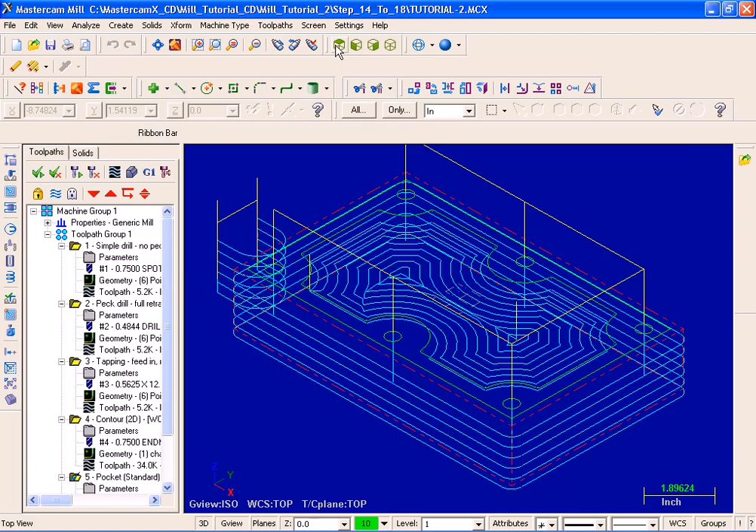Let's get working on step 14, modifying existing geometry. I'm going to add chamfers on the four corners of the outside profile. To start, I'm going to move up and pick the icon for top view. Next, I'll move over to the left, select Create, Chamfer, and then Chamfer Chains. When prompted, select Chain 1.

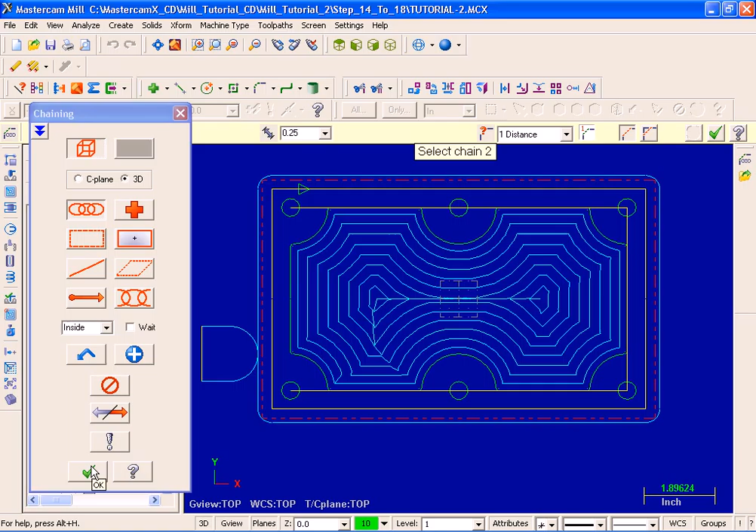I'm going to select this top horizontal line, and as you can see, it's successfully captured the contour. Moving over to the left, I'm going to hit OK. The chamfer distance is set to 0.25, so that's great. We've got it set up at one distance, and also the trim is turned on. Everything looks fine. I'm going to hit OK.

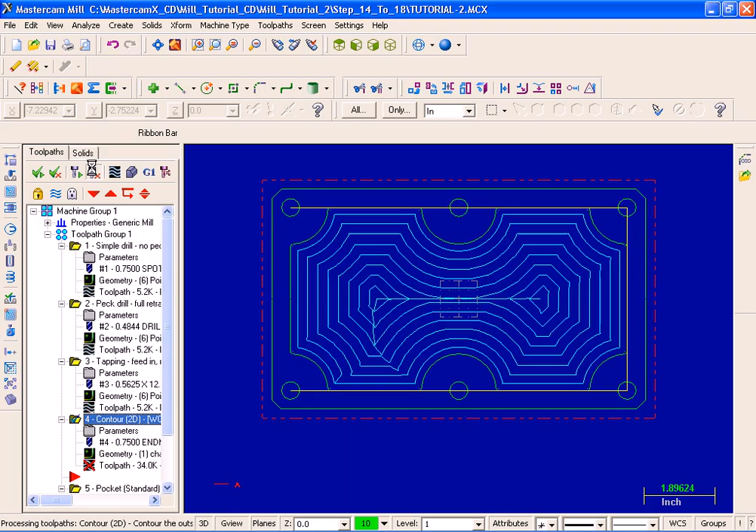If you look down in the bottom left corner, you can see an X against the toolpath for contour. What we need to do is regenerate all dirty operations. So I'm going to move on up and select the icon to regenerate all dirty operations, and that's got rid of that X.

Initially we machined out this pocket with a 3/8 flat end mill. Unfortunately, that end mill couldn't clean up the corners. The fillet radius is 0.0625 in the corner. So to improve the toolpath efficiency, we're going to use a 1-inch flat end mill to rough out the pocket. Next, we'll use a 1/8 flat end mill and the remachining pocket type to remove the material in the areas where the 1-inch tool could not fit.

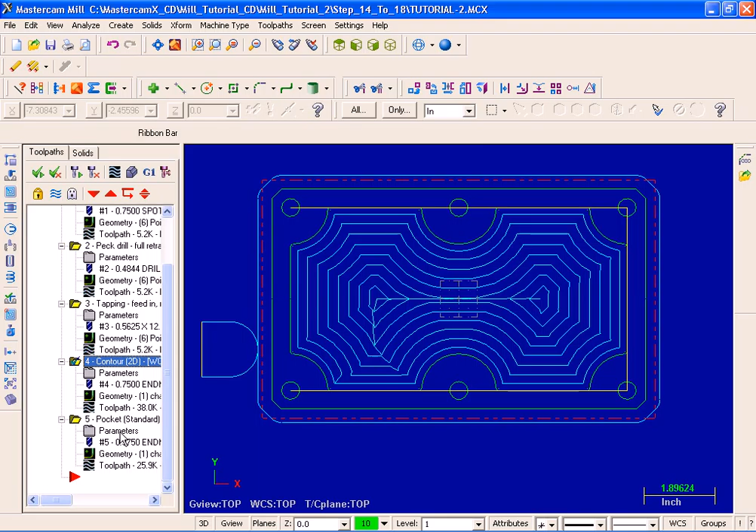What I'm going to do next is select Parameters in this pocket operation. In the Toolpath Parameters page, you can see I have a 3/8 end mill highlighted. I'm going to delete that tool by selecting the Delete key on my keyboard. When prompted, are you sure? I'm going to select Yes.

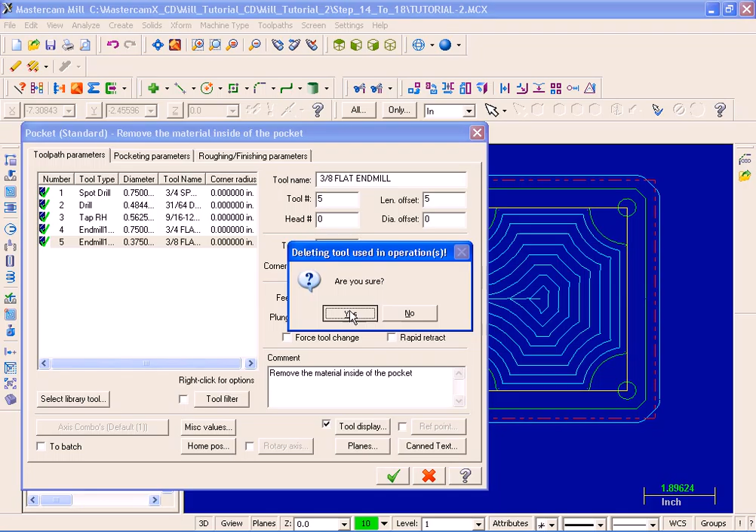What we need to do now is pick up a 1-inch flat end mill. I'm going to select Library Tool, move over, select Filter. In the Tool Types area, first of all I'm going to pick None, and then move up to the left and select this icon for flat end mills. Over in the Tool Diameter section, I'm going to leave Equal as is, but for the diameter I'm going to input 1.0.

Now I'm going to hit OK, and as you can see, it's filtered out a 1-inch diameter end mill. I've selected it. Now I'm going to pick OK. This is tool number 5. Length offset, I'll change that to 5. My comment is going to stay as is.

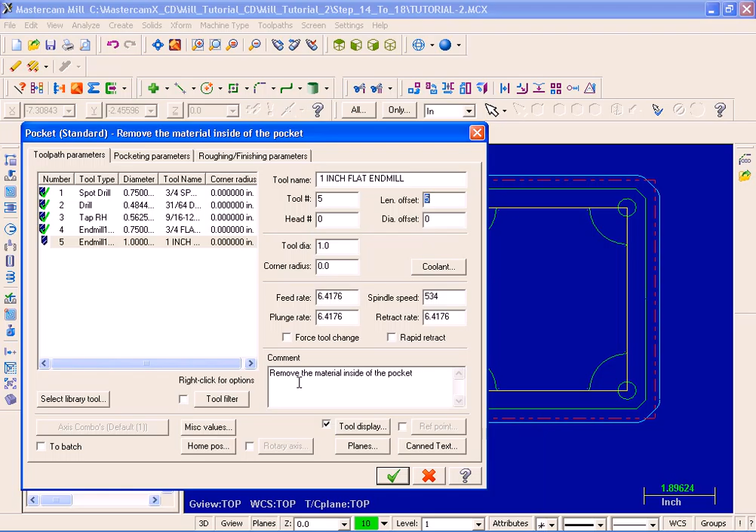Let's move over to pocketing parameters. My clearance, retract, feed, top of stock and depth are all fine, so they're going to stay as is. XY stock to leave, I'm going to change that to 0.03. What we're going to do is leave 30 thou on the walls of the pocket, and we'll finish the pocket off later. Everything looks great here. I'm going to pick OK. As you can see, we have a red X for the pocket. Let's move on up and regenerate all the dirty operations.

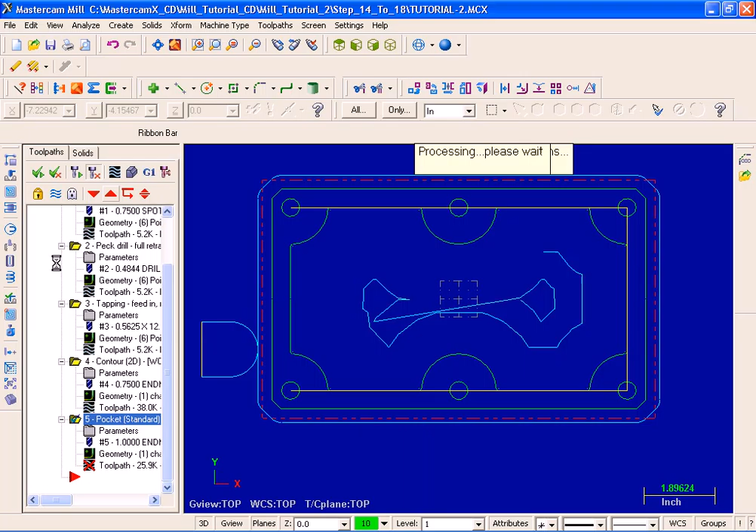Next, we're going to remachine the pocket corners with a 1/8 diameter end mill. At present, I have my pocket operation highlighted, got a check mark against it. I'm going to right mouse click, drag down and let go. From this menu, I'm going to select Copy After. Moving up, I'm going to select the icon to move the insert arrow down one item. This includes the second pocket operation. What we need to do now is move into parameters.

Let's go back to the toolpath parameters page, and the first thing we're going to do is select a 1/8 diameter end mill. So I'm going to pick Select Library Tool, then I'll hit Filter. Moving over to tool types, I'm going to pick None, and then again I'm going to pick this icon for end mill flat. Equal is going to stay as is, but for our diameter we'll input 0.125.

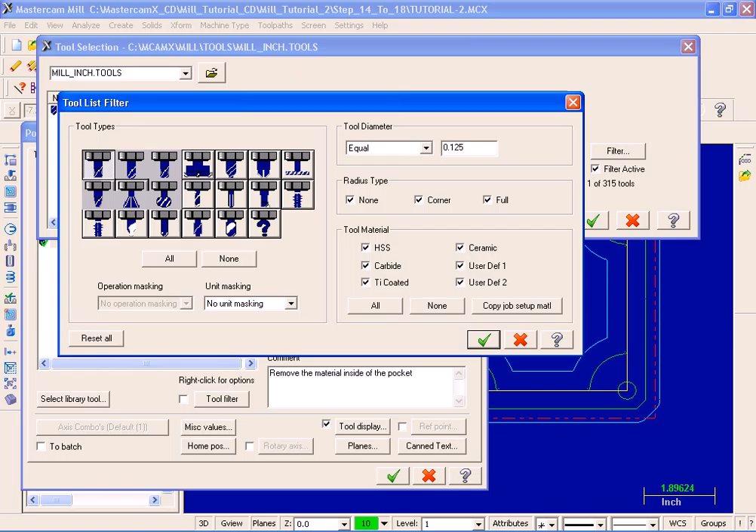Now I'm going to pick OK. It's filtered out the appropriate end mill, 1/8 diameter. I'm going to pick OK. This is tool number 6. Let's change the offset to 6 as well. I'm going to update my comment.

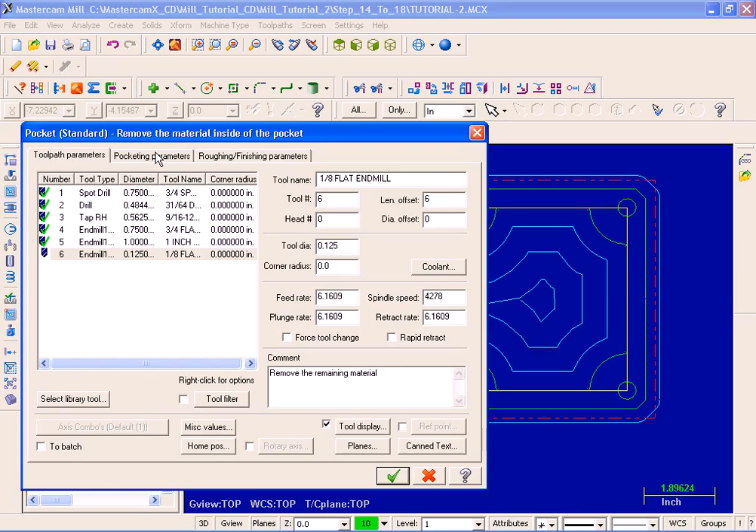And change it to remove the remaining material. Everything looks fine here. Let's move over to pocketing parameters. What we need to do here is XY stock to leave. Let's change that to 0. This is our finishing operation. Clearance, retract, feed, top of stock, depth, they're all fine.

Let's move over now to pocket type. I'm going to set it to remachining, and next I'm going to click on the remachining button. In the area compute remaining stock from, you can see we've got it set to the previous operation. That's the operation where we use the 1-inch diameter end mill.

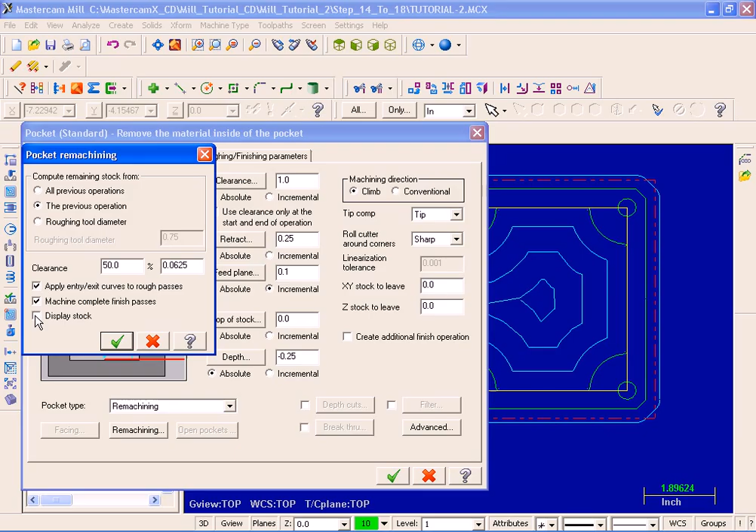Moving on down, we've enabled apply entry exit curves to rough passes, and I'm also going to put a check mark against machine complete finish passes and disable display stock. Everything looks fine here. Let's pick OK.

Next I'm going to enable depth of cuts, move into depth of cuts, and for the rough step I'll change that to 0.05, 50 thou. Finish cuts I'll leave at 0, and the finish step I'll change that to 0. Everything looks fine, so I'm going to hit OK.

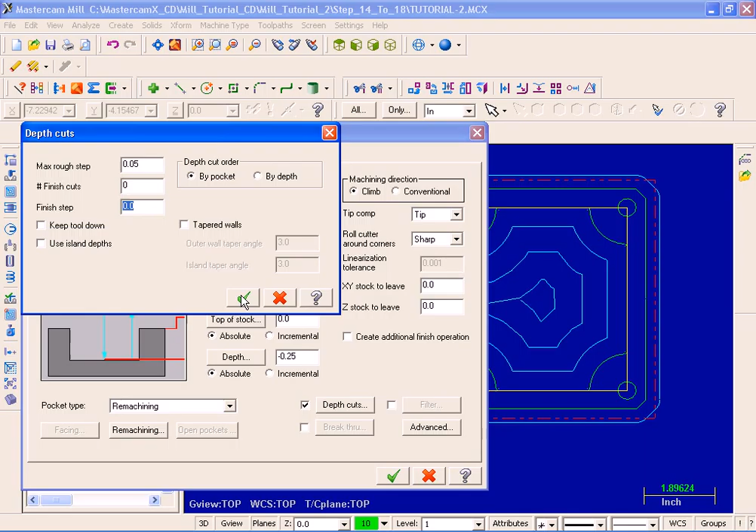Let's move on now to roughing finishing parameters page. The cutting method is set at parallel spiral, so that's great. Let's move on down and enable finish. I'm also going to turn on lead in, lead out, and move into the lead in, out.

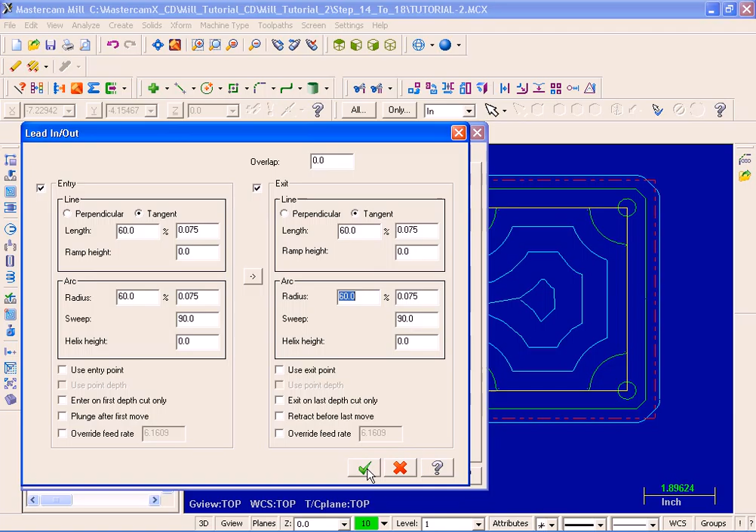Entries on, exit on. The length for my entry, I'm going to change that to 60%. The arc, I'll do the same, 60%. For the exit, I'm going to change the length to 60, and the arc likewise 60. Everything looks fine. Hit OK, and now I'm going to hit OK to exit pocket parameters.

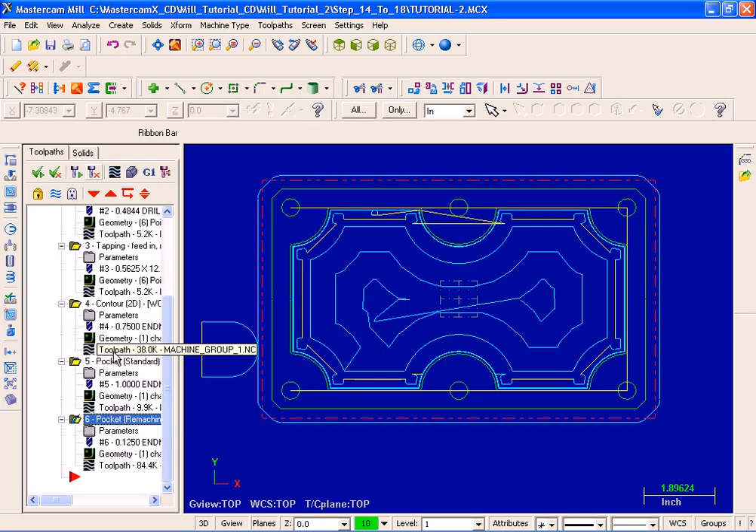We need to get rid of the X, move on up, regen all dirty operations, and the X disappears. Let's move on to step 15. Let's verify the part. I'm going to move up and select all operations. Next, I'm going to pick verify. I'm going to move the dialog box up and get an isometric view.

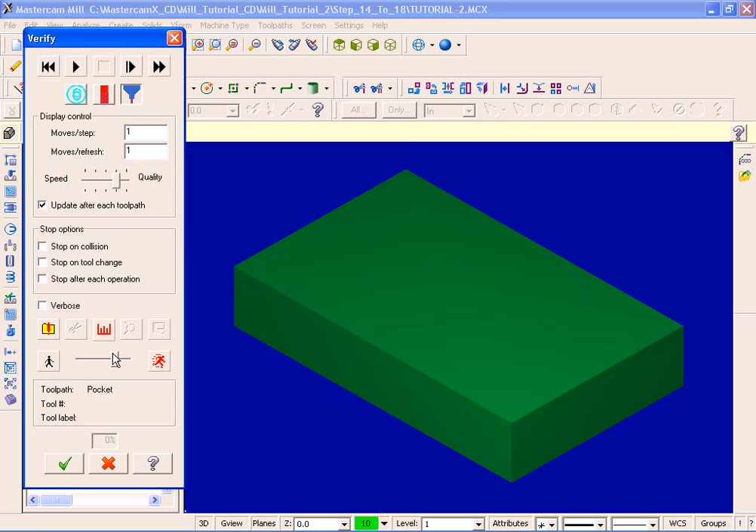This time I'm going to hit the button to simulate tool and holder. Let's increase the quality. Moving on down, let's slow the speed down. Everything looks great. I'm going to hit the machine button. First up is the spot drill. Next, peck drilling the holes, third operation, tapping.

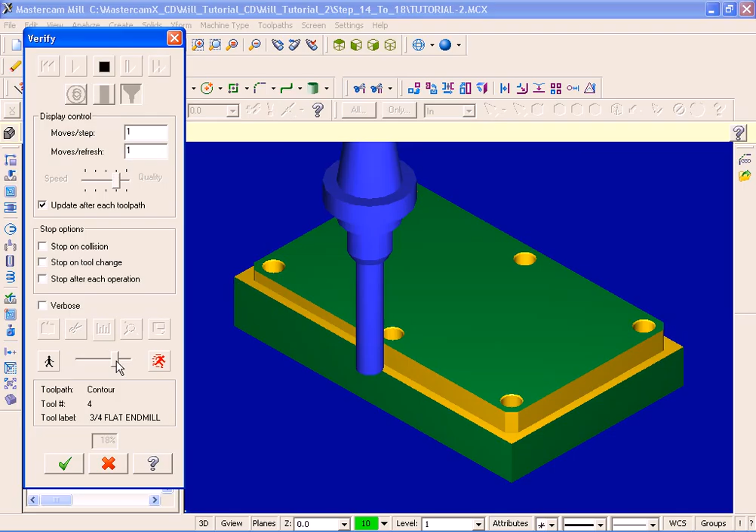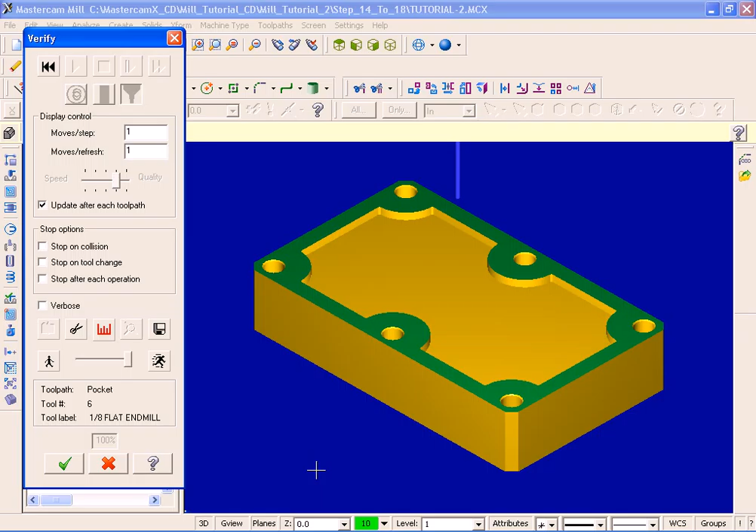Now we're machining out the contour. I'm going to speed it up. Machining out the pocket with our 1" end mill, and then finally finishing off the corners with the 1/8 diameter end mill, and then a finish pass around. Everything looks great. I'm going to pick OK.

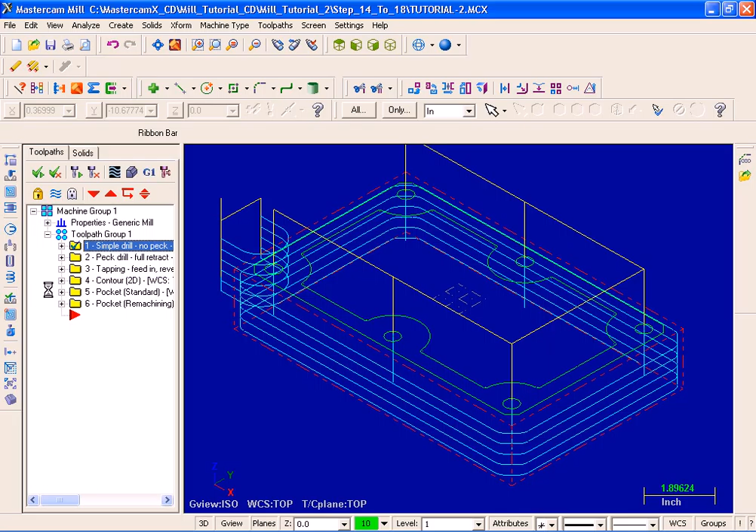Over in the Operations Manager, I'm going to right mouse click and collapse all. Next, I'm just going to select the first operation as spot drilling, hold the shift key down and hit the third operation, tapping. So there's a check mark against spot drilling, peck drilling and tapping. Next, I'm going to right mouse click and select Export.

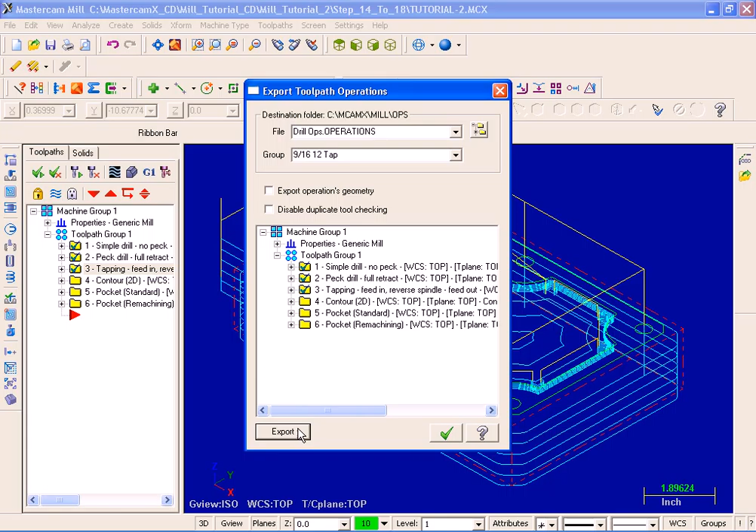For the file name, I'm going to type in Drill Ops. For the group, I'm going to type in 9/16 12 tap, and then move on down to the bottom. I'm going to hit the export button. I'm going to hit OK and then pick the OK to exit. We'll be using those operations in a later tutorial.

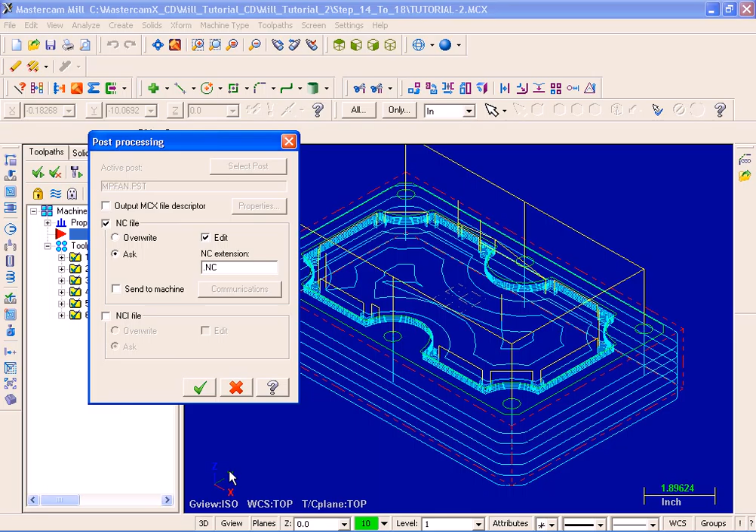Step 17. Let's post the file. I'm going to move on up, select all the operations. They've all got a check mark against them. Go up and post selected operations. Everything looks fine here. I'm going to move on down, hit the check mark. For the name, I'm going to put in Tutorial-2 and hit save.

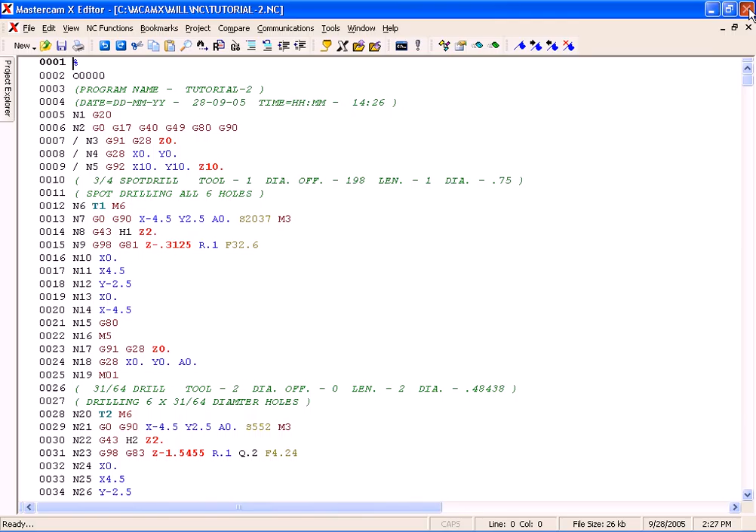And there's our completed CNC code for Tutorial 2. I'm now going to select the X to exit the editor. Now it's time to save the file. I'm going to move on up, hit save. That completes Tutorial 2 and this video.